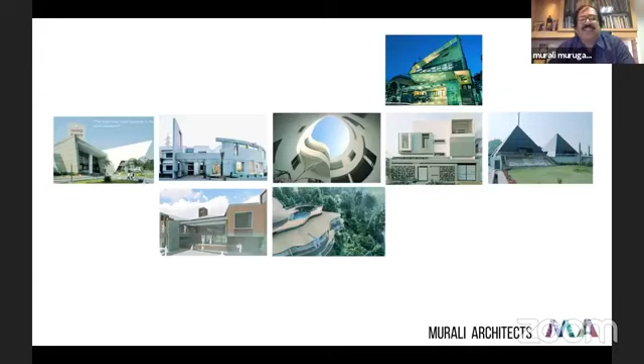Some of the pictures you are seeing are part of that larger practice. In that larger practice, I was involved in the design of metro stations, the Coimbatore bus stand project, and many hospitals—26 hospitals in the first phase, spanning a period of 10 years.

After I paid back all the loan and solved all my family problems, I thought, what am I doing, is this what I wanted to do with my life? So I decided to close my commercial practice, which had about 30 people. I asked the permission of my wife, can I close down my commercial practice? She said, it's fine, as long as you are not taking my salary, it's fine, you can close the commercial office.

I closed the commercial office and started a one-person architectural practice. Initially it was very discouraging; not many projects were coming. But then I thought, now everything is settled, I have a home, I have a small office, why not patiently wait and do what is best? So I was at crossroads, I didn't know where to go.

Then there was a project—a small 40 by 60 site. After doing the Coimbatore bus stand on 32 acres and the metro stations, imagine my first independent project was this small 40 by 60 site. And there was a tree growing next to the building, and the client was keen to cut the tree.

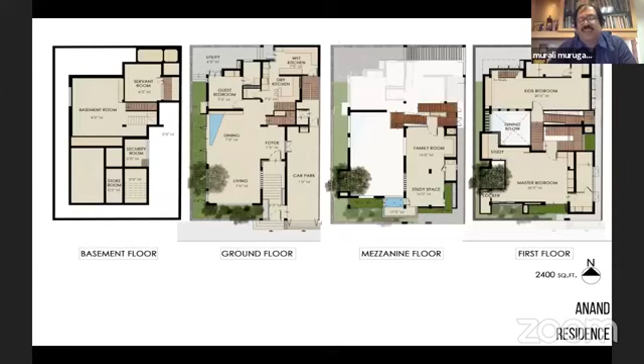In the plan, you can see it was part of the living room—it was growing inside the living room, and on the first floor, it was coming up to the master bedroom. During construction, I requested the client to leave a cutout in the ground floor living room roof, and the client was kind enough to allow us to have the tree.

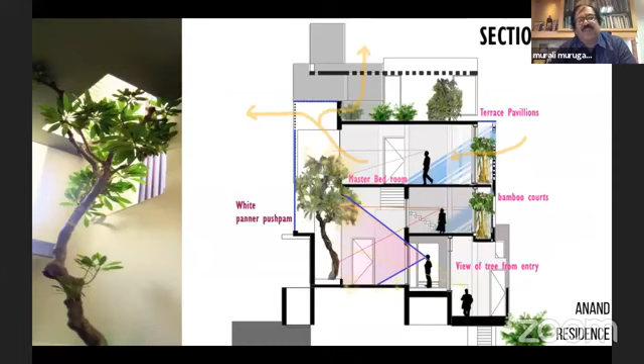The tree began to become part of the house, and we built a series of courtyards on every floor. Now the house is built, people are living there, and the tree is part of the living room. Every room in that house, since the tree was there, we had to go for a tall roof.

To accommodate the tree, it was about 20 feet high. Many of the rooms eventually became tall rooms since the ground floor roof was 20 feet. So we went for an attic kind of planning. After completion, this became a small landmark in Chennai.

We wanted to reuse many of the materials. The client was a contractor, so he had a lot of farm material wasted. We used that for handrails, and even the I-sections were reused from his building construction site.

I also felt we should use many of our local materials. The compound wall, and the inner areas, if you notice, we were using our local building materials from nearby Coimbatore and all that, not using Italian marble and things like that.

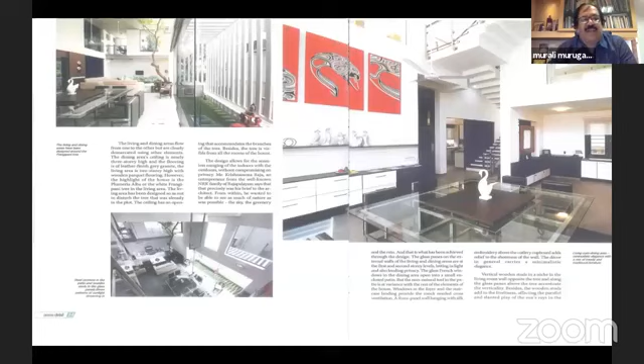These are some of the pictures inside. Then we got another small project, which was 1,400 square feet. This is the thing.

One day a woman walked into my office. The minute she came to my cabin, she was in a very pleading manner. She was asking, 'Will you do a house for me?' I said, 'Why not? We are there to do the house.'

But she said, 'It's a very small property, sir. It is only 1,400 square feet. Will you be interested?' I said, 'Nothing to worry, you come and sit, first have a seat.'

She came, sat, and then I asked her, 'Why are you in a hurry to build?' She said, 'My husband is working abroad, so he's here now. He will be leaving shortly in a month's time. So I want to finish the delivery, as well as make the plan ready, so that in his absence I will construct.'

But the site was too small, and they were borrowing heavily from a bank to purchase the land and also to build. So what we did is, instead of following the government's 5 feet rule all around, in a 1,400 square feet site, if you leave 5 feet all around, you have hardly 700 square feet.

But then we thought, this 5 feet setback, why not we make a beautiful garden out of it? The IT people are generally very stressful, so we said when they come back from work, they should feel like walking along a path across it, and then going into the house rather than entering the house directly.

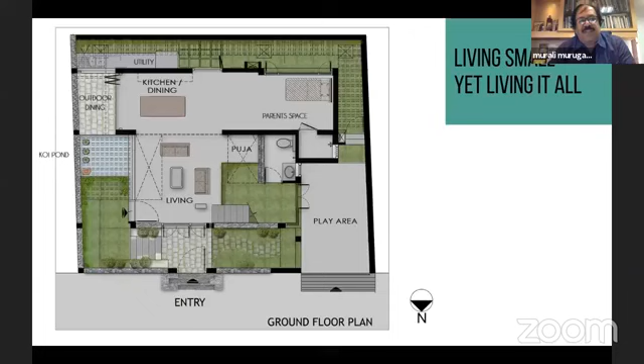So we created a circuitous road from the car park area to the entry of the house. We felt the whole house can be built with organic material. The whole compound wall is made of green, and we went for gabion walls. A gabion wall is made by creating a metal mesh and putting pebbles or stone jellies or whatever rubbish you have, then we put creepers over it. It gives a good ambience.

This is the entry. As soon as you enter, you don't see anything. You see a small park-like ambience, and then you walk across to finally reach the entrance door. Once you enter, it's like a very protected womb of a mom, so you don't have to worry about what is happening outside.

The whole world comes inside, and we have removed the grills from the windows, pushed them to the boundary. So every safety measure is done at the boundary level. The pergola protects the people, so the entire side setback, that 5 feet, becomes part of your house. These are some of the inner spaces.

And the roofs also, we didn't want to plaster. So most of the thing we left it as it is. So the exposed brick walls, the stone walls, and the roofs are also like that. And the flooring also cement floor.

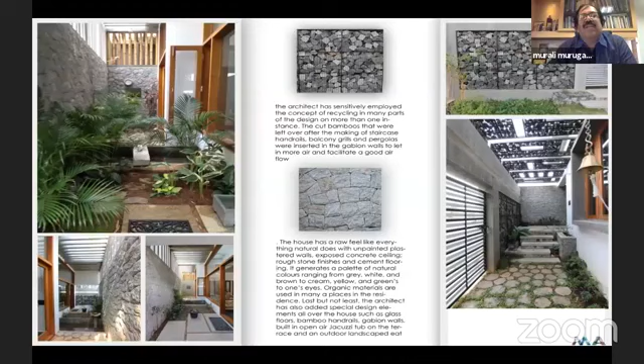Now this is the present state of the house. So these are some of the material palette. The upper one is the gabion wall we were talking about. Gabion is a metal mesh, and I will show some more of that. So these are the bamboo used, exposed brickwork used, exposed concrete was also used.

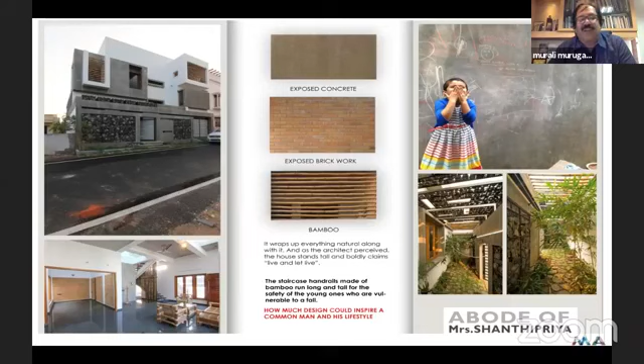The whole house is very minimalistic, and they have one elderly mother living and the daughter living. You can see the daughter, when I visited after the completion, she was thanking me with beautiful drawings on the compound wall. This is during her birthday. I was also there. So the house becomes a beautiful place, it's very, very small, but then it has become a beautiful place for the small family.

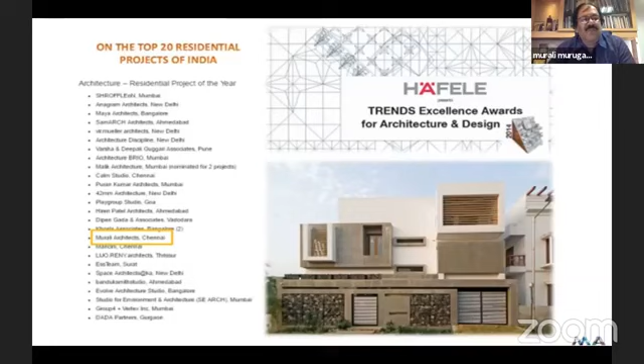And this was sent to our national for some award. So it was selected as one of the top 20 houses in India using natural materials and stuff like that.

So while working on these projects, I felt our education is more towards Western kind of a thing, and we have totally forgotten about our traditions. So when I started my practice again, I said, why not I revive whatever traditional elements that we had. So thinnai, which is a multi-function space, is used in so many ways.

I'm going to quickly go through, I have a lot of slides. So why not revive thinnai? Why not bring the courtyards? Bring back the courtyards. Maybe courtyards with greenery.

And again, one more interesting aspect which we are trying to do in the last 15, 20 years is you look at some of the pictures wherein the mom is in the kitchen and the granny is also there, and everybody goes to the kitchen and they are sharing and chatting. This is how we were living.

Now the kitchen has become like an 8 feet by 10 feet small dabba, where nobody can go. So the earlier living really made people come together. The present day living is making people move away from each other. So we wanted to somehow bridge the gap so that the 3 generations of people can comfortably live together.

So some of the earlier kitchens, some of the workspaces, I don't know who killed those spaces, is it architects who killed it, or is it engineers who made this? But masons never did that. Only after the invention of cement, in the year 1940, 50, the cement factories came to India, we started removing our traditional tile roof.

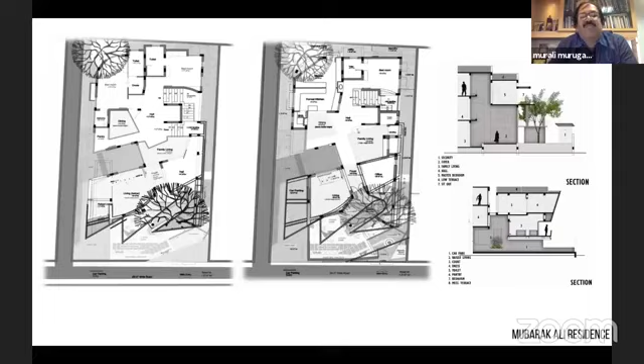So in this house, we removed the car and put it to the side so that nobody needs to see it. The neem tree becomes the focal element around which the whole house revolves. We allowed the tree to grow through the house, giving a lot of setback, so some of the balconies really go through the tree.

In order to complement the tree, we went for exposed concrete. The front facade was done with exposed concrete and metal decking. Since we didn't want to cut many of the branches, we worked on the steel structure on site so we could find where we have space between the branches for the balconies. We wanted to work close with the natural material.

This is a small house in Tanjore for a professor, a college professor. In this, the only request he had was about his elderly mother, since his father had died. The son, who studied in IIT and was about to go to Germany, Dr. Adaleesan, with his wife—his mom was not happy. She was crying all the time the minute she heard the news that he was going. He came back home and asked his mom what she wanted.

She said, Son, I'm going to be here for some more time, only 10 or 15 years. Why are you leaving me? Why not we live in Tanjore in our own small place itself? So Dr. Adaleesan decided to live in Tanjore.

The request he had for me was that somehow my planning should take care of his mother—everything revolves around his mother, so give her a proper placing. So what we did is right at the entry itself, we provided the mother's room so she gets to see the grandsons when they come from school, and when relatives come, she is able to see them. Till the time of her death, she would be able to participate in all the activities of the house.

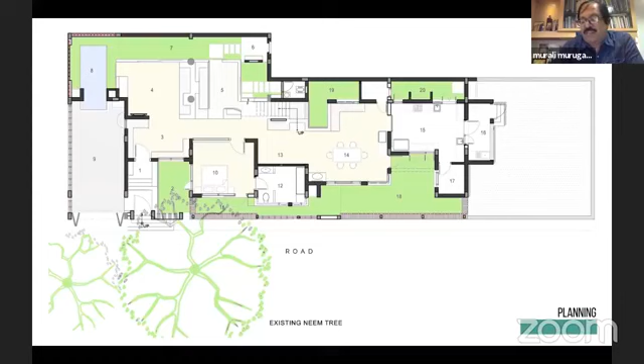Generally, old people's rooms are given at the end of the house in a small dingy room. This year, we wanted to celebrate her life by giving it right at the entry. Room number 10 is her room, so she will be the first person to receive any guest, the first to open the door for the grandsons, and she knows everything about it. She is not disconnected from the house. Now, from her room, you can see the whole house.

Since they didn't want sofas and stuff like that, we went for cement furniture, which can be used for seating, sleeping, and also for children playing. This graphic shows how the mom can see from her room the road, the vendor, and other parts also, like a ship captain.

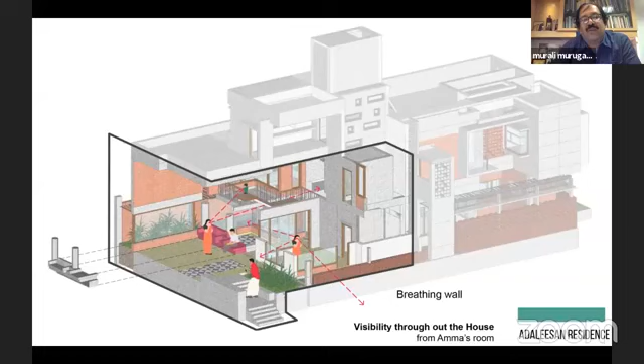For an elderly mother who doesn't have any other work other than being with the children and taking care of the house, this is a kind of heaven. She can see the garden, she can see every activity on the street. The house is raised quite a bit, and since there is a road nearby, we didn't want a passerby to look into the house.

So these are some of the inner portions of the house. Every room has a small garden, with a setback between the compound wall and the building. The greenery had not grown yet when the photograph was taken. We used Athangudi tiles for the flooring.

Arthagudi tiles for the flooring. You can see the seater being put into different activities - one is granddad sleeping, and the children sliding and playing. This can accommodate a lot more people than your sofas, the 2-seater, 3-seater sofas. So a lot of cross ventilation is achieved.

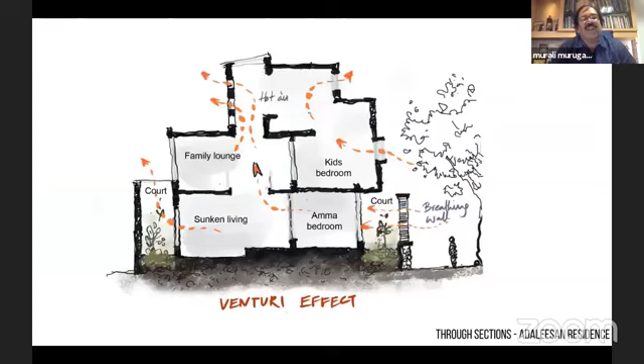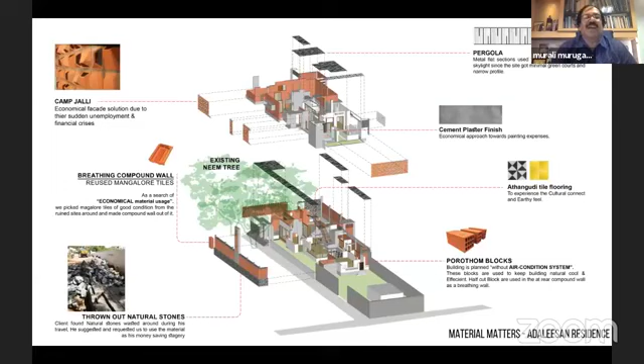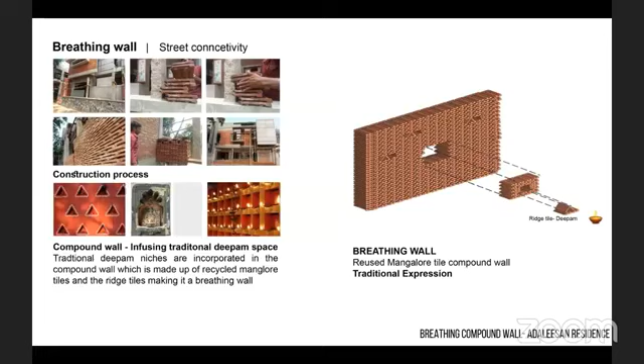This is an isometric view to show different types of material used. You've used camp jallis, a lot of courtyards within the house. We also reused some of the tiles because Tanjore is a traditional town - a lot of tiles were broken, 100-year-old, 200-year-old, so we bought them and used this as a compound wall which will breathe. We also have small niches for the lamps, oil lamps.

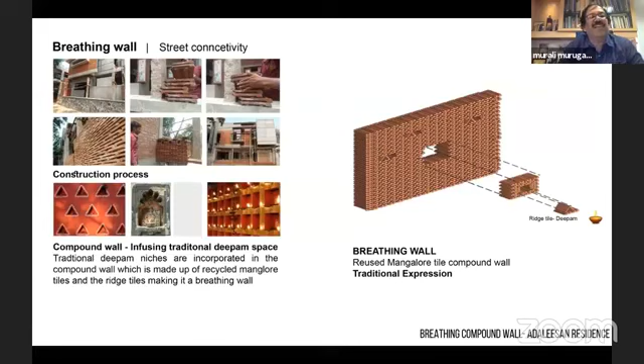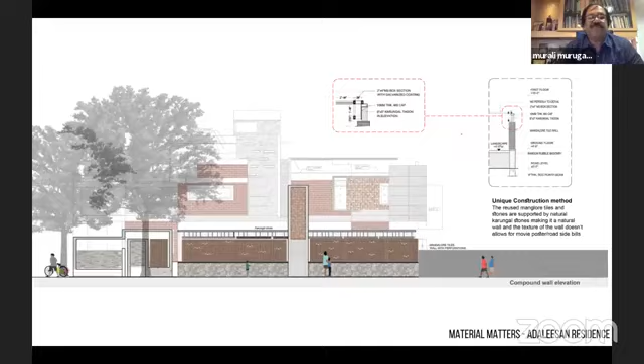During the functions, you can keep them like the way you have it in Kerala. The inspiration is Kerala temple architecture. In the compound wall, the lower portion is the random rubble wall, and above that is the recycled tile with triangular openings for the oil lamps. The facade is a combination of exposed brickwork and exposed concrete work. You can clearly see the oil lamps during festivals like Diwali and stuff like that.

Inner portions - they wanted it to be very rustic, as natural as possible. So we didn't paint many of the cemented surfaces.

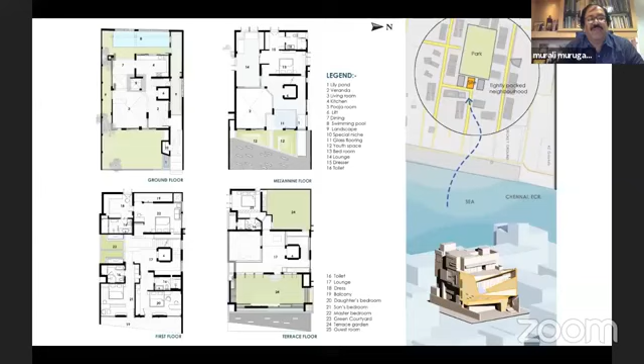This has got 3 generations. My client's name is Mr. Ramesh, he's about 50, and the 2 sons are about 18 at that point of time - now they are 23. And Ramesh's father and mother are 76 and 70 years old. So they all wanted to live in the same space.

We have a habit of having a chat session with the client for at least 5 to 6 hours every time we meet. With this client, we would have done nearly 30 hours before we started the drawing process. When you have long chat sessions, you become really close to them and they begin to see the good side of you.

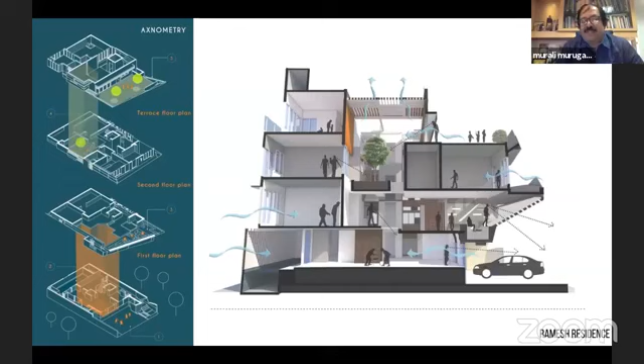In this case, when I asked the twin sons how many friends do they have, each of them said 20 friends. I was really surprised - 40 friends coming home is a big challenge, and I never had a situation like that. I asked the parents, should we entertain them, what is the thing? They said they seem to be very good friends, let them come and let them have a special place for them. Now I'll just show.

Inside the house, we created a series of courtyards, allowing a lot of sunlight to come in. Since this is near a seaside area, we also wanted the sea breeze to come in. So you see the angular brown color louvers which allow a lot of cool air, and seaters built in the traditional fashion.

The house is being used presently - the right side is for the two sons, and the left side is for cousins and relatives, father and mother. The grandma comes and uses the house very regularly, she stays with them. So different parts of the house are where the three generations really come together and share the spaces. Now this is the next project.

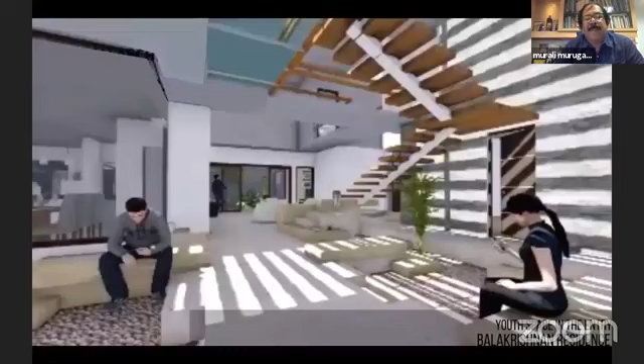We always felt teens require their own space, so as soon as you enter, the first space is the teen area. There's no formal living room, because the children are the future of the home — so beautiful informal courts exist for children to hang out with friends or take calls.

On the rear side, the women of the house want to play shuttle badminton in the evenings, so full safety is given with a pergola. The whole house is secured because the husband works abroad.

Internal areas feature a court with seating all around. On the left side is the puja space, again with seating for the mother to rest and chat with her elderly friends, along with some inner portions.

The courts have seating throughout. We always feel washrooms are one of the important areas, so sunlight can enter and plants can be placed there — that's where you can personally unwind.

There's another house at Erode, the Paneerselvam Residence. Here, the neighboring houses were closely packed, almost touching the compound wall on the left side. So we felt, why not convert the constraint into an opportunity? We created tall boundary walls to form a separate enclosure, which I'll show inside. Geoffrey Bawa, a master of courtyards, has nearly 50 courtyards in his own house, which inspired us to attempt something similar.

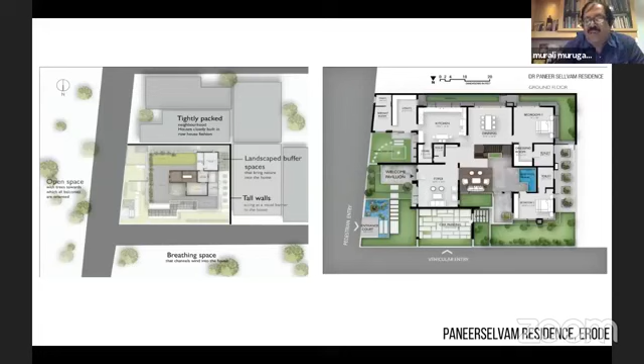Since the focus is on the gardens, a lot of decks were included, and every room opens out onto the decks. Inside, there are small water bodies, courts, and murals. On the upper right, you can see every bedroom without a grill, because the compound wall itself acts as a tall wall with a pergola on top.

So you can see the left top is the dining court, which has got a green wall. The whole site is covered with green wall all around. Now you can see the side of the green wall. But then for safety, pergolas are given.

So every room, we have removed the grill and every room flows into the garden. And every room again gets a very private balcony. It's all in the upper floors.

This is for the daughter - she was really asking us, when the one son was there and the daughter is there, she was asking, 'Uncle, why is my brother's room a little bigger than mine?' And the dad said, 'You will get married and go away.' But she said, 'Nothing doing. I also want the equal kind of thing, but I don't want a bigger room. I would like to have a huge romantic balcony. Whenever I come home with my husband and children, I need to have this garden.' So this is an extension of our room.

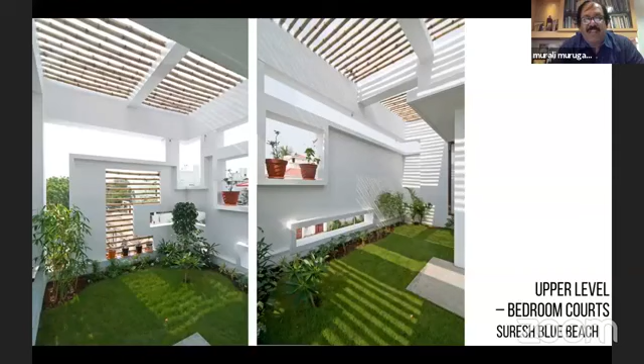So again, some of the other houses where we have water as the welcoming element, some of the bedrooms are fully covered with greenery all around, removing the grills. So the bedrooms become part of a natural setting.

So in some of the areas where the houses are raised, we invite the neighbors for evening. Children can come and play in the car area. The grannies and moms can chat. So the entry step itself becomes like a chat space.

Again, we feel for the children who are playing in the street, and the picture on the right has a traditional element where they can play in front of the house and hang out. So mom knows their son is around, and she also gets to know his friends.

So every house of ours will have these wide seaters in the front, so that the youth can hang out there. And in some of the smaller houses, we use glass as an important element.

So it connects the ground floor and the first floor. The children above can get to see the parents or grandparents using the living rooms, and the parents and grandparents also know what the young people are up to - there is a connect. So continuously, every minute, you are not moving away from eyesight. The younger generation also can become part of the house, knowing everything about it.

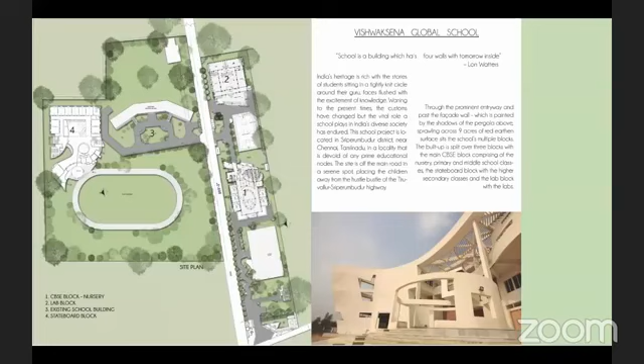So this is for a school, and this is a large campus. Again, we made it a green campus, a series of buildings where we also have the children's primary school in the front, and the higher secondary on the left side. It's fairly a 9-acre campus.

And this is the primary school, nursery and primary, with a series of green courtyards around which the classes evolve. You can see the nursery coloring and the courtyard too. The scale is brought down to accommodate the children's scale. The colors are also very vibrant, and the openings are not like conventional ones, so the children can really have a dream-like ambience.

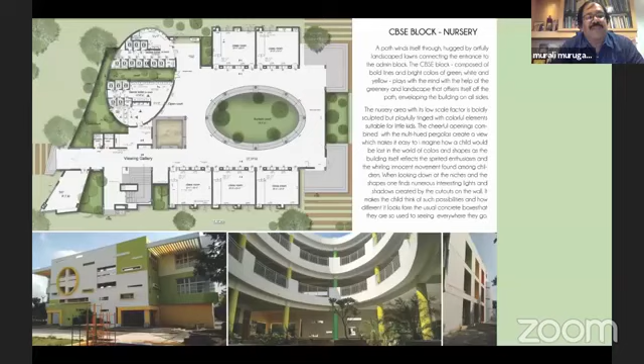This is for the secondary area, where a lot of plazas were created, so students want to hang out before any class. For them to conveniently hang out with some privacy, some screen walls are also provided, so that they escape from the peeping eyes of the faculty.

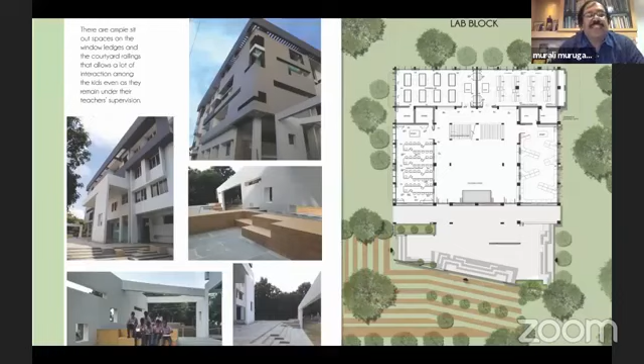This is another block in the same campus. We use curvilinear forms. We didn't feel like making a straight line corridor, so most of the corridors are in a curvy fashion. The spaces are also curvy, in order to give them a feel that they are not in a rigid ambience.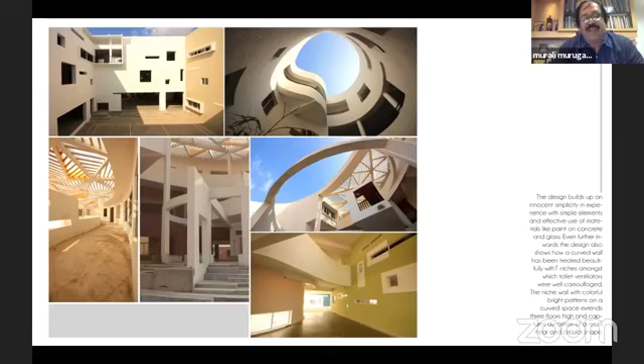Again, some other pictures, a lot of pergolas to cut down the sun. Chennai is very hot.

This is another highway restaurant which we did. Generally highway restaurants are like dabbas, boxes - a restaurant eating place with a small toilet next to that. That's the standard typology. But when this client came to us, we said we will break the conventional way of building. For a person traveling from Kerala to Chennai or from Andhra to Chennai for 8 to 10, 12 hours, they get really, really bored. So to undo that boredom, why not we create a structure which is really inspiring, which also gives them a feel that they can relax here for at least half an hour or an hour during the journey.

Many times when people travel, there will be at least one granny or some elderly person. They cannot sit in the car for 8 to 10 hours like that, so they need some breaks.

So what we did was, we wanted to learn from the traditional weekend markets - in Tamil we call it Santhai. On weekends, all the people in the village go to one market where the merchants put up little shops only for the day, and at the end of the day the shops vanish. In Tamil Nadu we have this culture for nearly hundreds of years, and they are not fading away like the modern markets and malls done in today's context.

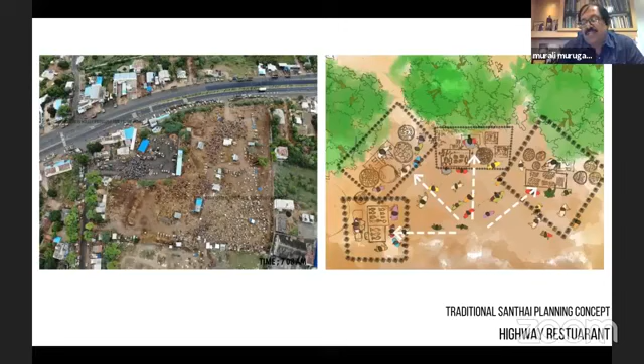When somebody walks in, they may need assorted items, so these diversified clusters give us scope to make the center alive and vibrant. We thought, why not take that concept and have assorted kinds of activity - one for a restaurant, one for an ice cream parlor, one for a sweet shop, one for a petty kadai or small shop, one for someone who wants to buy a smoke, one ATM. So we brought the components together to make a cluster.

People who travel on the highway travel at great speed, 80 to 120 kilometers per hour, so the structure should capture their attention. In order to do that, we went for polygonal shapes - as the car is turning, one person may be looking at one block, and on the other side somebody else coming may see a different one. So there are diversified viewpoints.

But even then, we were not happy. The client wanted to clean the restaurant and shops every day with a lot of water. When we discussed with the plumbing consultant, he said we need a pressure pump to supply the water continuously, but the client was not in favor. He was a small time restaurant owner with about 500 square feet earlier, and he said, sir, I cannot afford to pay for the electricity bills.

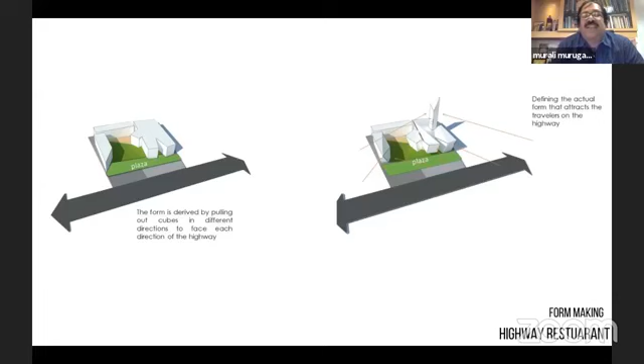So this tower is seen from a very far away place also, even up to 7 kilometers people say they are able to see it, and lights are there. So this gives us a good indication.

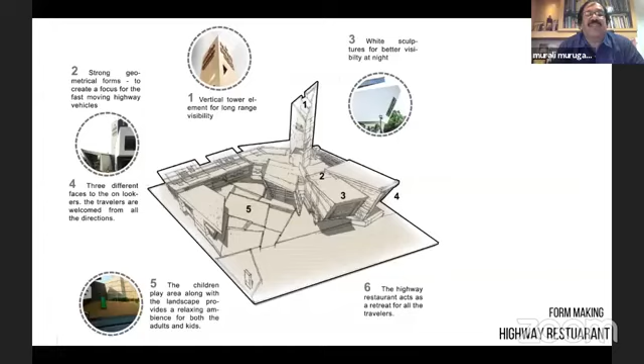Now this is the final project that I'm going to show today. This is for Udavum Karangal. There is a charity organization called Udavum Karangal, wherein people who are nobody, people who are not cared for, people you see in the bus stand and railway station, like mentally deranged people, and some pregnant lady, mad-looking woman, who may have been abused by people. This organization aims at giving them a new life.

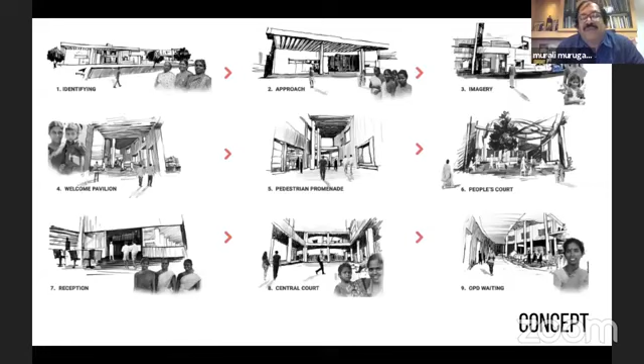So likewise, we understood the psychology of the poor people and worked it out. I'm not going to go too deep into that. The site is a low-lying area next to a canal, so we had to raise it.

We raised it considerably. And in the plan, we said every hospital is so rigid, it's threatening. Why not we have a hospital which is very free-flowing, curvy? Even schools of architecture say hospitals need to be functional, 90-degree kind of a thing. Whereas I've done 26 hospitals, and I realized there's nothing like that.

Earlier times, the hospitals were built by engineers, guided by the doctors. The doctor does not know anything about architecture, so he guided simple boxes. That has become like a prototype or typology for hospitals.

In this case, we wanted to move away, so we created a series of courtyards. The minute somebody enters, each of the curvilinear paths takes them to one particular department, which will have a courtyard. Each courtyard will have a color scheme.

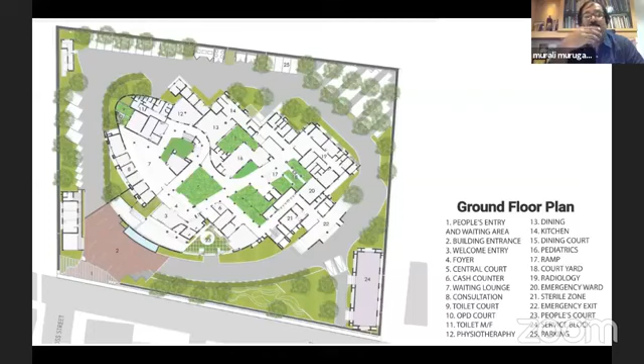The poor people's understanding of spaces is very restricted. So they may understand a yellow court, they will know, they may be able to recollect. But if you say it's a radiology court, or pharmacy court, or OPD court, they will not understand. So each court will have a color theme.

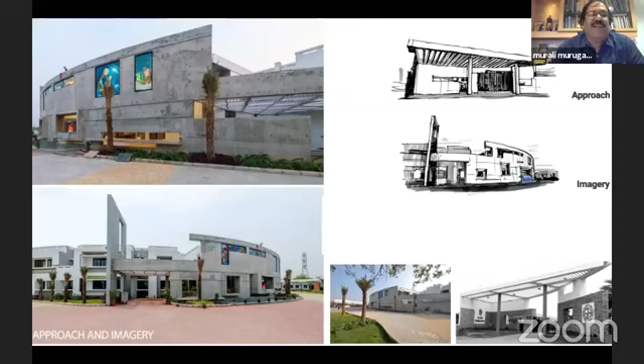And this is the building. So the building, we wanted it to look a little rusty, and the curvy form demanded RC walls, so we left the RC natural as it is.

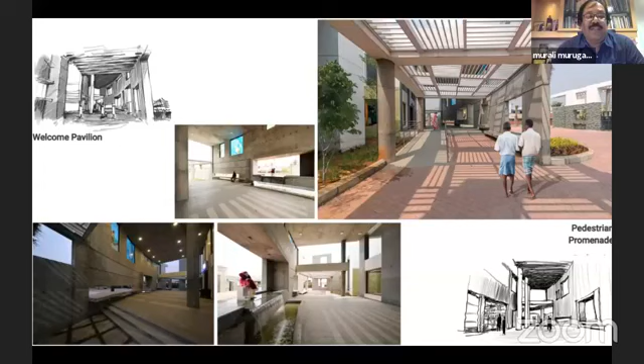So these are some of the inner spaces. It is not a busy kind of a thing. Nobody is allowed to come in by car. The car will go to the parking, and people who are sick will be taken to emergency, so there the car can go.

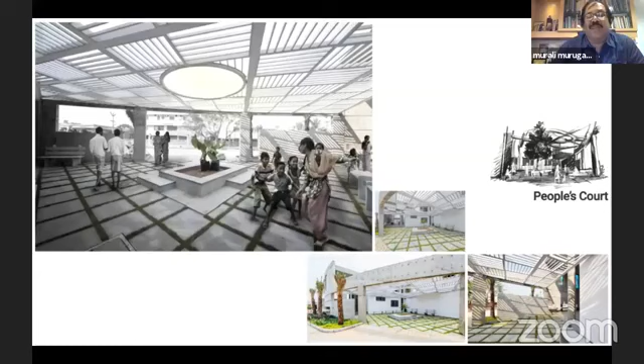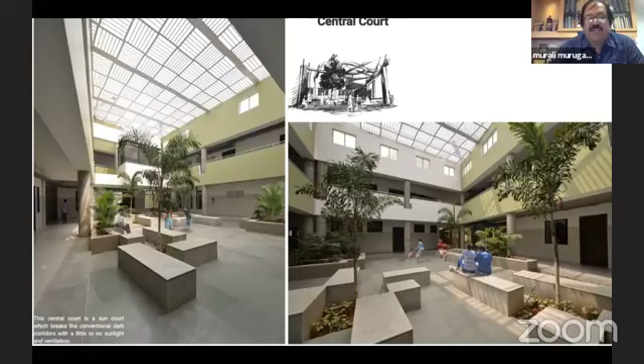And this is the welcome pavilion area we are talking about. On the left side on top, you see this pergola court. Any poor family can come, sit there, hang out till the son or father or somebody comes and takes them inside. Once you go in, you are welcomed by this central court. The reception is in front of you, so it's not threatening. Around the courtyard are all the facilities, and the court is also used for multifunctional activities—some camps can be conducted, and the hospital can have some functions and get-togethers like that.

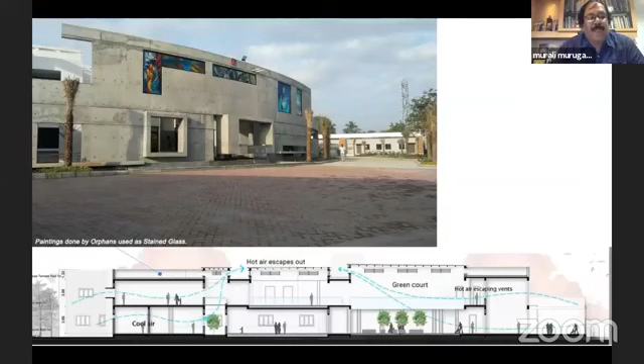So these are different things. In the cross section, you can see the ventilation, hot air escaping. It's like a very low-slung, normal, non-threatening hospital. Color is used everywhere. You can look at the floor pattern creating pattern, so when people come there, they know they are in this particular area. A lot of color paintings were also there to humanize the ambience.

Recently it was in the news that somebody who got lost from Orissa was identified here. So this is the end of it. Thank you.